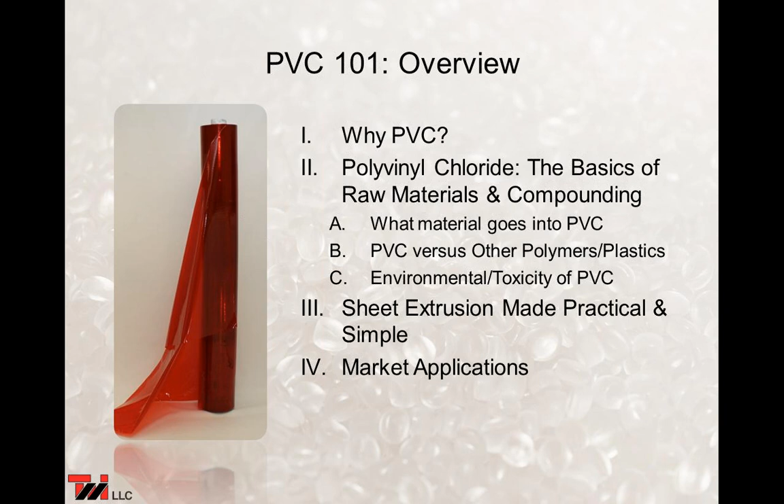So why use PVC in manufacturing products? Four key reasons that we see. First of all, inherent flame resistance. PVC is naturally flame resistant. The thicker the material, the more resistant it is to flame and fire.

Faster part approval. So if we take a sheet of PVC and we make parts out of it for, let's say, the automobile industry, the material meets agency flame ratings, which reduce part testing and turnaround time for getting the products out into the marketplace.

Chemical resistance. PVC resists discoloration or stress cracking from cleaners, foods, oils, detergents, insecticides, and many chemicals. There's a lot of information available online, or through some of the references we'll show you later in the presentation, as to what chemicals specifically it is resistant to.

UV resistance for an enhanced image of your finished products: in their final application, parts look newer longer because they resist discoloration due to UV exposure. PVC is naturally UV resistant. However, if there is going to be long-term outdoor exposure, then a UV inhibitor has to be used in the product to make it more UV resistant for a longer time. Specifically, if the part is used in New Mexico versus being used in Minnesota, you have two very different applications that it has to be prepared for with the UV inhibitor.

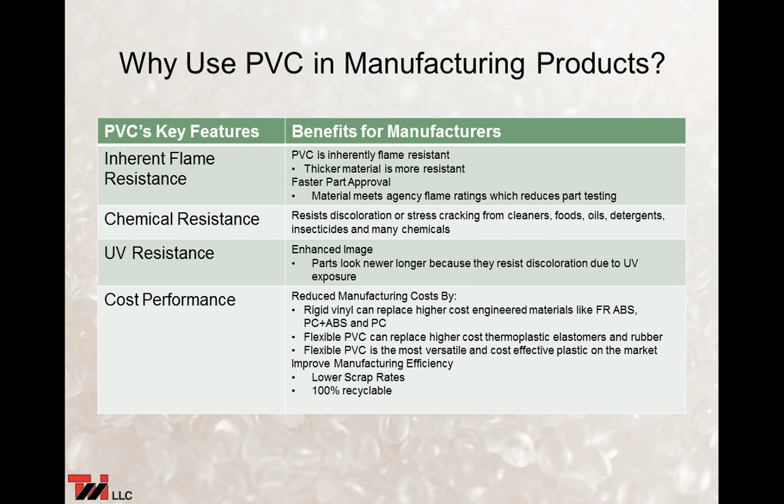We've listed some of the many markets that are available. There are so many applications that we've just listed some of them, specifically maybe more suited to sheet extrusion and calendering, which we'll get into a little more later. Strip doors, such as walk-in freezers or freight doors, 8-inch, 12-inch, 16-inch strip, I'm sure you've seen that in its application. Clean rooms for medical device manufacturing, usually related to the medical industry. Computer and electrical equipment enclosures, data center enclosures, where you have to have no static electricity, so you use an anti-stat type product. Sound block or sound attenuation, a huge market, where you might need something like a theater application where you don't want any sound getting outside, so you build into the walls a sound block product. I mentioned automotive - there's so many applications in that industry.

The shades that go in the back of SUVs, the heel and toe pads that go underneath the matting on the front driver's side of the car. Tank linings, again a broad industry. Tank lining is used for potable water tanks - we'll talk again about NSF 61 - but also for grease tanks, used at a restaurant for instance to store their grease out back. For fuel, for oil, spent oil at service stations, again so many applications.

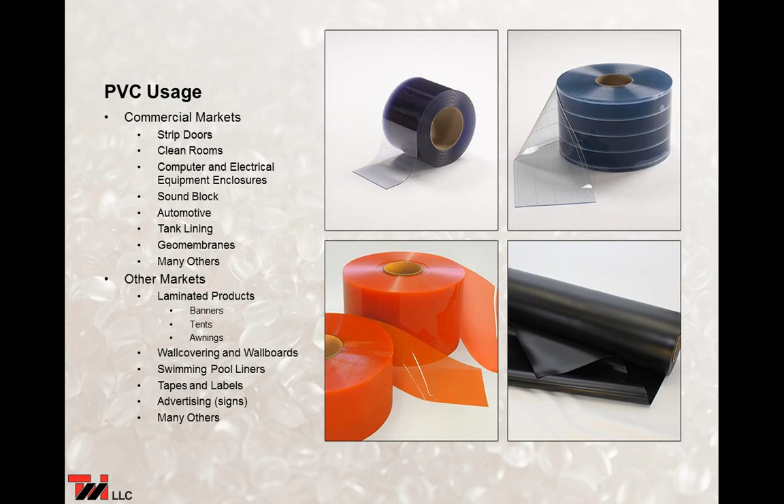So let's talk about PVC, the basic product. There's a lot of misunderstanding, and lack of knowledge is maybe a better way to put it, out in the marketplace about what PVC resin is. I'm not a chemist, so I'm not going to get too deeply into the basics of how it's made, but I do want to dispel some rumors and at least give a little information on it.

One of my favorites of the misuse of it is if you go into a DIY store like Home Depot, or any DIY store in the country, and go to their outdoor furniture area. If you walk up and look at those plastic chairs sitting there, the cheap ones, $10, $20, whatever they may be, ask the clerk what it's made out of, and they'll tell you it's made out of resin. What kind of resin? It's made out of resin. Well, the fact of the matter is it's made out of PVC resin.

So anyway, PVC resin is the building block of polyvinyl chloride, or the building block of polyvinyl chloride sheet. It is a product of salt and oil or natural gas. Generally in this country, natural gas is used to make polyvinyl chloride resin, but it's a combination of the two. Other polymers, as we'll look at later, do not use salt as one of the building blocks - that's the difference.

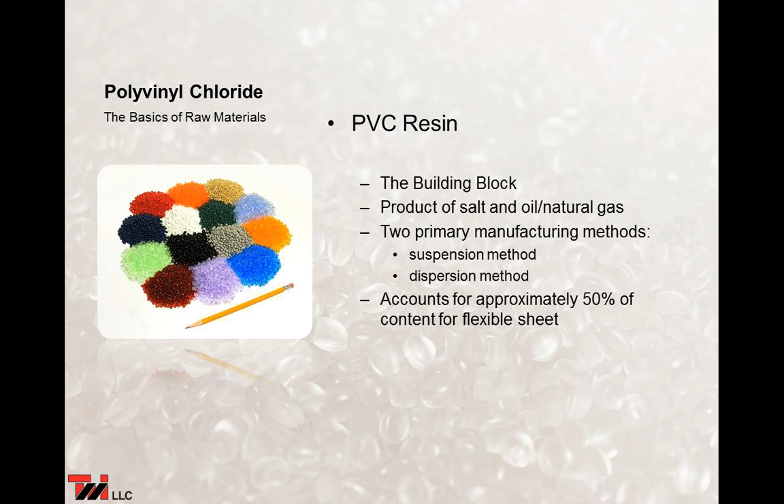Plasticizer accounts for 30 to 40% of the flexible sheet, so those two raw materials make up the biggest part of the product. We'll talk a little bit about market pricing and how it's driven, but if market pricing affects either of those two, you can see how much of a difference that'll make on the cost of PVC sheet.

Plasticizers are the additive that give flexibility and pliability to flexible sheeting. Types include phthalates, which I'm sure you've heard of as allegedly a bad actor, and adipates, which are generally used for low temperature applications—freezer applications or cold winter weather. Then there are phosphates, used as a flame retardant additive in clear sheet, which helps maintain the clarity of the sheet.

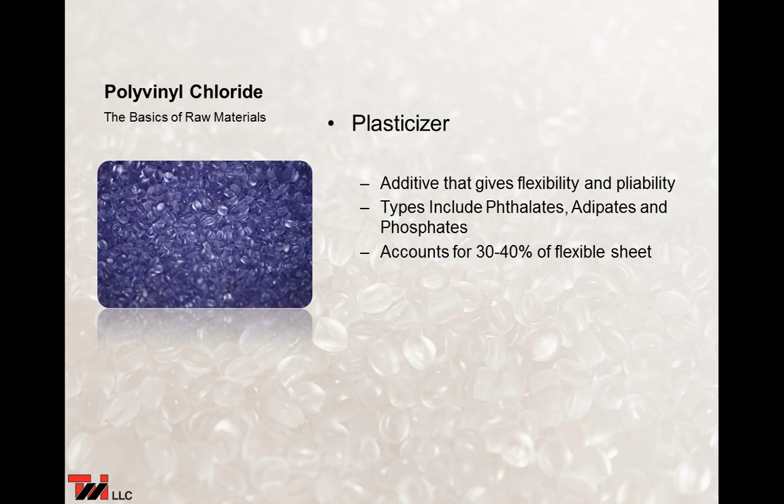So let's talk about the remaining 10 to 20%. These come in varying quantities depending on what you want the PVC flexible sheet to do. Fillers—you want to use as much filler as possible because it's a very low-cost additive. It's basically calcium carbonate or clay.

The stabilizers are used to stabilize the sheet during processing, either the initial compounding process or the calendering or sheet extrusion process. They help keep the material clear and help keep it from burning up. Some common stabilizers are barium zinc and calcium zinc.

Next is process aids. Process aids basically help in the processing of the material through the equipment. Too much and you have exudation on the material. Too little, the material doesn't process very well.

Fungicides—there are basically two kinds, Vinyzene and zinc borates. Vinyzene is very commonly used in wood to keep bugs out of the wood, literally. Fungicides, again depending on the application, for an outdoor warm weather application you want to include more fungicides.

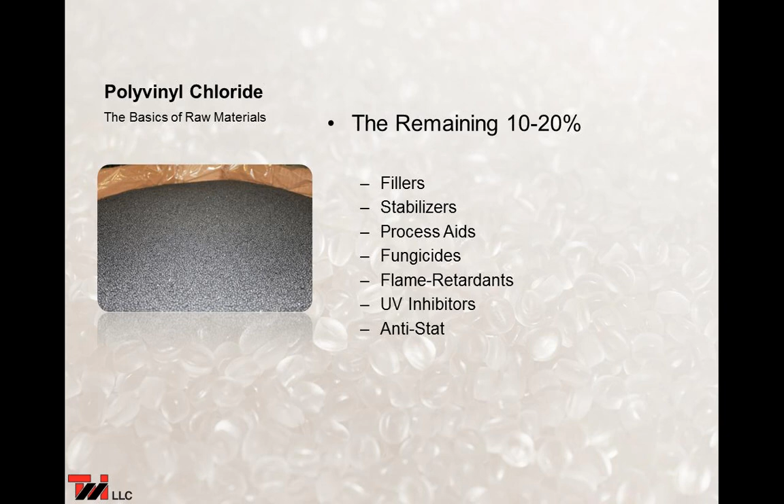I mentioned pricing in the PVC sheeting market. It's driven by two primary items: oil and/or natural gas pricing. Even though most PVC resin in this country is made using natural gas, oil still is one of the big drivers. If you watch the pricing of oil, you can see what's going to happen to the cost of PVC—manufacturers still tend to follow oil prices. As oil prices increase, prices for other polymers based on 90 to 100% hydrocarbon, like polypropylene and polyethylene, increase at a higher rate than PVC, because PVC is only 43% hydrocarbon based, so there's a lot lower usage of oil and/or natural gas in manufacturing PVC resin.

The second factor is seasonality. This refers to the beginning of the construction industry, generally in the March, April timeframe, when construction starts to take off—you'll see the price of PVC resin, which affects PVC pricing, start to increase. Generally at the end of the building season, you'll see the pricing start to back off.

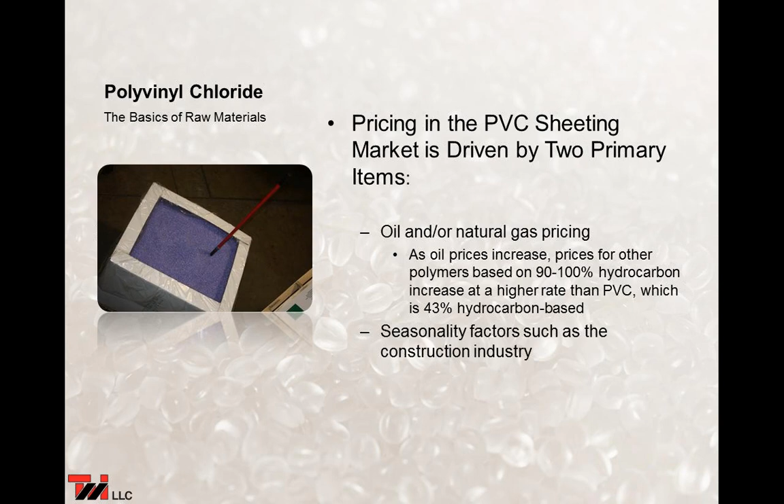There are other factors beyond these two primary typical ones. The hurricane down in the Gulf of Mexico, I believe back in 2005, made a huge difference in pricing—it knocked out a couple of crackers, so they had to shut those down, and there was a raw material shortage for the basic building blocks of PVC. That type of thing will affect it. There were also issues with raw material supplies out of China a number of years ago, which dramatically affected pricing, and we recently had a shortage in anti-stat raw materials, which also affected it. Generally, though, these two are the biggest factors.

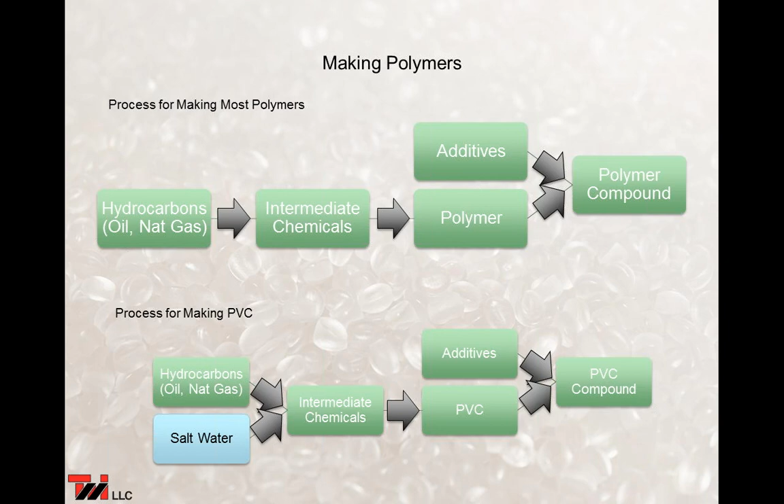USA and Canada PVC demand in 2010 was 9.5 billion pounds. China, which everybody knows is growing dramatically, is expected to demand up to 44% of total global demand by 2020. They're going that direction, while the United States is going the other direction. Two of the biggest drivers in the PVC world are PVC pipe and PVC windows. Those two together account for a total of 58% of the total demand for PVC. Big drivers.

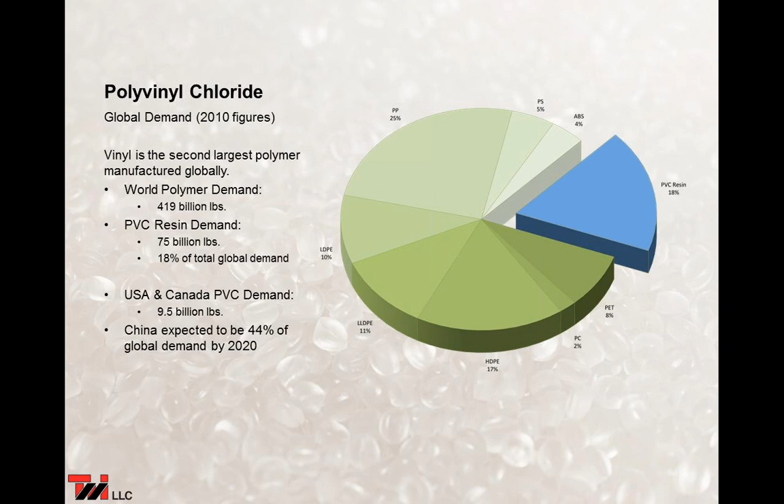Calendared vinyl film is a much larger process, with 9-foot diameter rolls. The machine itself is probably 60 feet long, a very, very complicated piece of equipment. Calendaring started back in the days when the tire industry first started - they invented calendaring lines to make sheet rubber for tires. It evolved into PVC and other polymers being developed, and basically it makes a sheet that's then converted into a product for any number of end-use applications. You can calendar film down to 3 mil, 2.5 mil, or 2.5 thousandths thick, generally up to about 30 mil, although some calendars make heavier material.

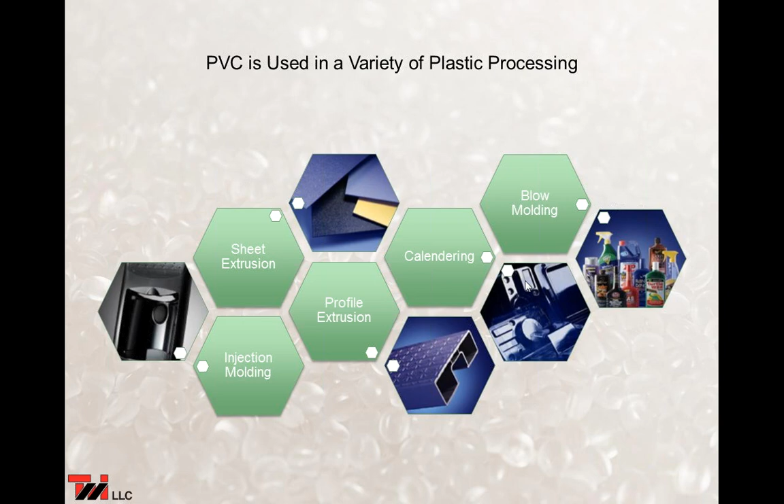Let's talk about some of the eco-friendly advancements - there are some pretty exciting ones. The first one, I'd say, is going to be something widespread. Many manufacturers of plasticizers have come out with a bio-based plasticizer. It's plant-based, meaning a smaller carbon footprint, and of course it's a renewable resource. All testing to date has shown pretty much that it acts and reacts just as a phthalate-based plasticizer system or adipate or any of the other types of plasticizers. So stay tuned, I'm sure we're going to hear quite a bit more about that one.

And of course, lead additives are phasing out in North America and Europe, just about there, and lead should be removed from these products. It's not something that we want to put in a landfill, basically, is what it comes down to.

On the eco-friendly side, there are fewer volatile organic compounds generated in PVC than in PE, PP, or ABS. Vinyl chloride and chlorine gases are not released if PVC degrades - another misnomer out in the marketplace is that if you put it into a landfill, you're going to get the emission of chlorine gases. Not true. PVC can be safely recycled, landfilled, and incinerated. PVC is also processed at lower temperatures than competing polymers, meaning it requires a lot less energy.

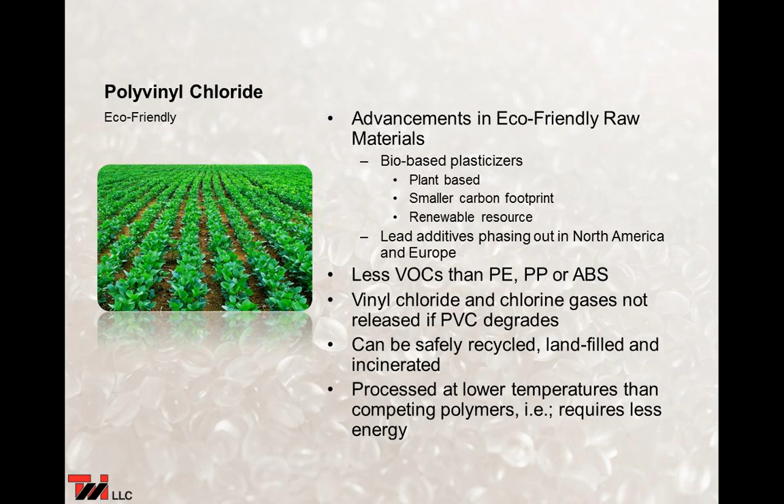Safe, non-toxic polymer, PVC has been safely used for over 50 years. Vinyl chloride monomer, VCM, is the basic building block of PVC resin. I'd encourage you to go online and look at videos on Wikipedia or other sites that show the exact process for making VCMs. It's a fascinating operation, but the exposure is well below levels that pose any type of threat.

The FDA, Food and Drug Administration, has approved PVC for food packaging. The FDA and the United States Pharmacopeia have approved it for medical use. CPSC, the Consumer Product Safety Commission, a federal agency, allows vinyl use in children's toys. We'll talk more about phthalates and some of the other misinformation out in the field a little later. The NSF International has approved it for potable water piping, NSF 61 specifically refers to that. Underwriters Laboratory, the CSA, a Canadian FR codes approval group, California State Fire Marshal, and the National Fire Protection Association have all approved PVC for fire safety. And finally, PVC has not been legislatively banned by any country, state, or province.

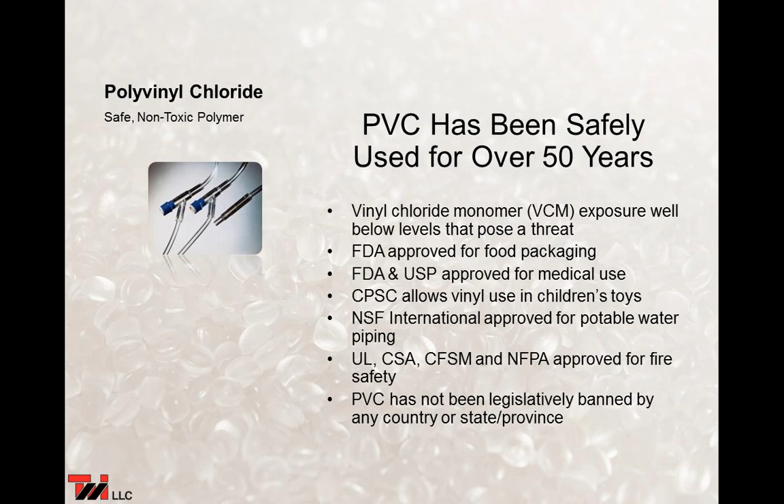So let's talk about phthalates in children's toys, and the Consumer Product Safety Improvement Act's phthalates provision for toys. We've provided a full breakdown, a two-page summary, which we'll glance at near the end of the webinar. It's very wordy and complicated, but it will be included in the webinar notes, so if you want to refer to the legislative action on phthalate plasticizers, you'll have it at your fingertips.

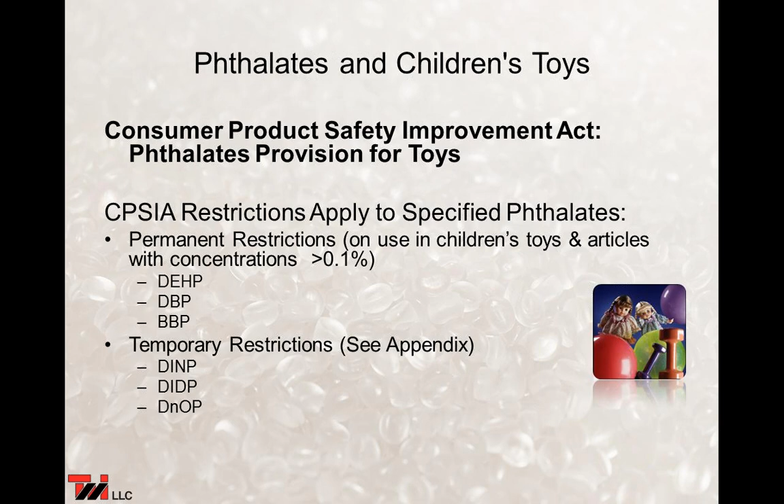The CPSIA restrictions apply to specified phthalates. There are permanent restrictions on certain phthalates for use in children's toys and articles at concentrations greater than 0.1%, and those three are listed. Temporary restrictions were placed on DINP, DIDP, and DNOP. DINP and DIDP are by far the two phthalate plasticizers most used in the production of flexible PVC sheeting. But these temporary restrictions aren't quite what they appear to be — we'll talk about that shortly.

The materials are then pelletized. If you've been in a processing plant like sheet extrusion or calendaring, you'll see the pellets — they're just exactly what they sound like, little pellets. In the background you can see pretty much what they look like, but they're air cut, underwater cut, or strand cut. The pellets are then packaged and shipped to the processors.

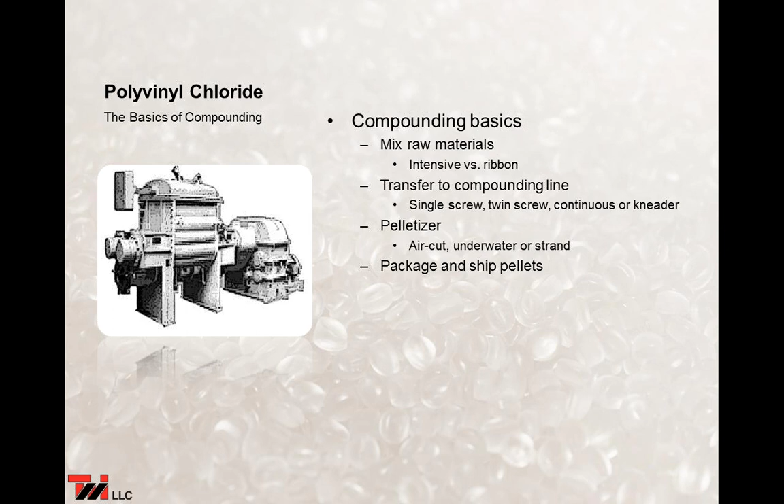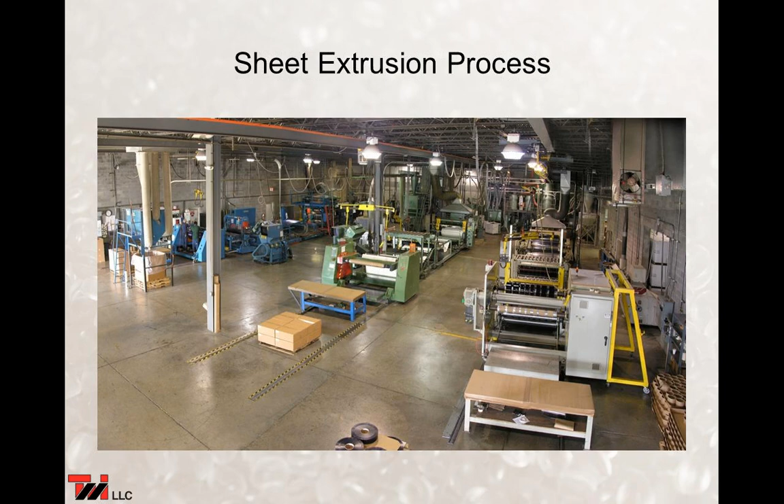The material then goes through a cooling water bath and out into a slitter, where it's slit down to various widths — that's the point where you get your 4-inch wide, 6-inch wide, 8-inch wide, whatever width might be needed. The excess material is removed and driven back through the process. With 100% recycle, it's driven back through and reused at about a 25%, maybe slightly higher rate. The material then goes into a winder where it's wound up on a core, depending on the product being manufactured.

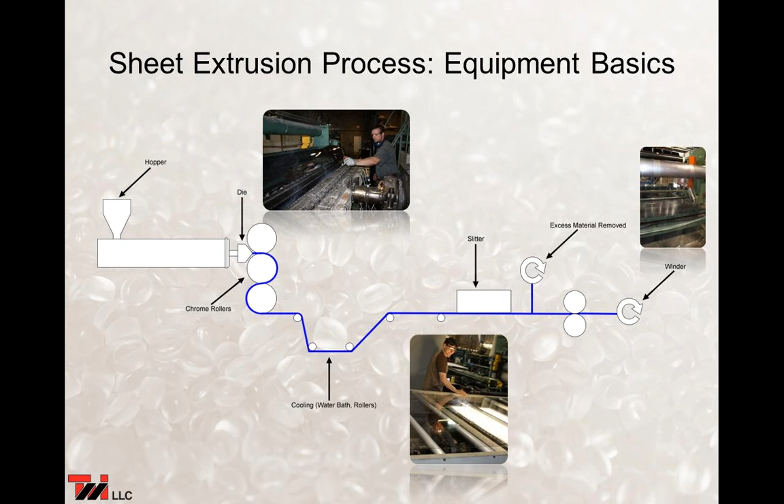So let's walk through it real quickly.

Compounded raw materials, as we mentioned, are moved to the manufacturing area, typically in boxes, gaylords, or via a silo. Silo is the most efficient way to do it. You fill the silo up and then vacuum basically the materials out of the silo into the dryers or hoppers. Compound is then taken from that point into a system of hoppers and dryers, and that's the image on your left. You can see the vacuum hose in the gaylord removing the compound from the gaylord.

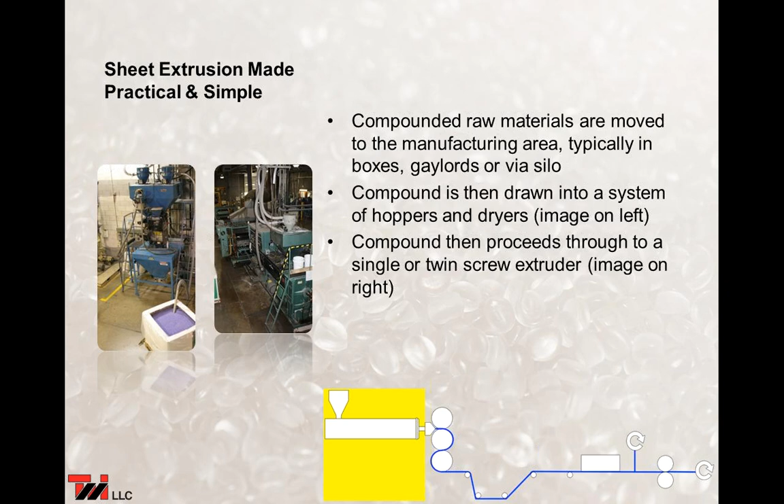Compound then proceeds through to a single or twin screw extruder. That's the image on the right and the highlighted image below. This material is then conveyed through the screw and into a sheet die. The compound is remelted and mixed by both shear heat and pressure through this process. So, as we mentioned earlier, it goes through the extruder through a process where it is melted in the screw and out through the die.

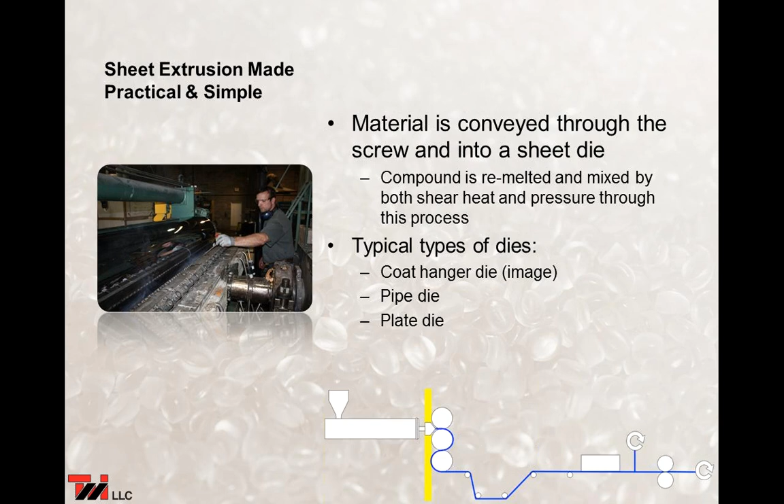After exiting the die, the PVC is then forced through a series of chrome rolls. Thickness of the material through these two processes is determined at this point in the process. Typically in a sheet extrusion operation, which is what you're looking at, material ranges anywhere from 30 thousandths thick up to as much as a half an inch thick. Quite a broad range. Those three rolls, typically there's three types of rolls that are used.

A high polished roll, a frosted roll, or this is where the embossing is done on the material. If you have a light stipple or a leather grain emboss, you would remove the top roll in the stack and put that embossing roll into that point, and that's what gives you the embossing on your material, or the grain as some know it.

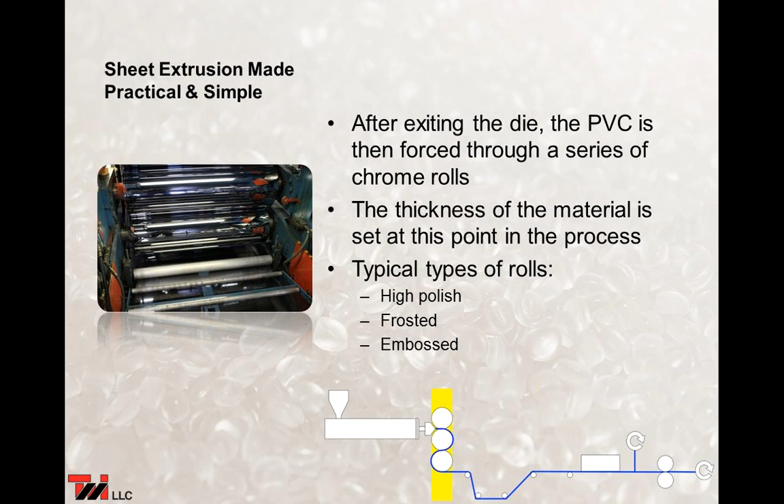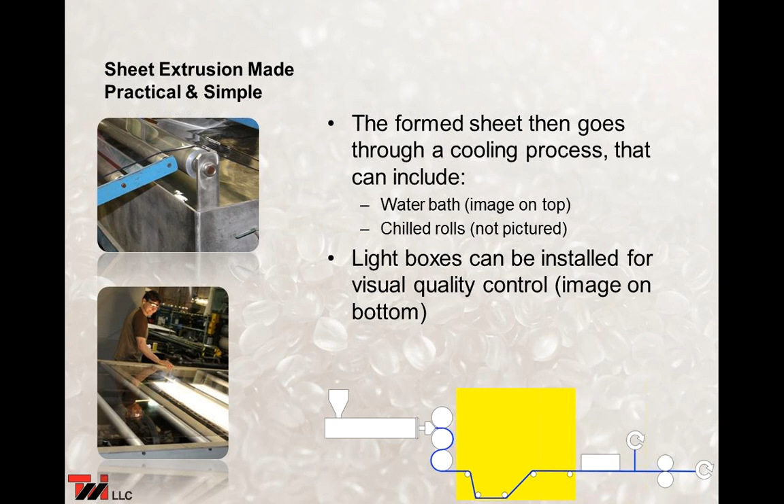And if you look closely at the picture, and we actually have a video to show you that'll illustrate this a little bit better. But the material in the middle and on the sides that's being pulled taut is being fed into a grinder and then back into the front of the process to be 100% reused.

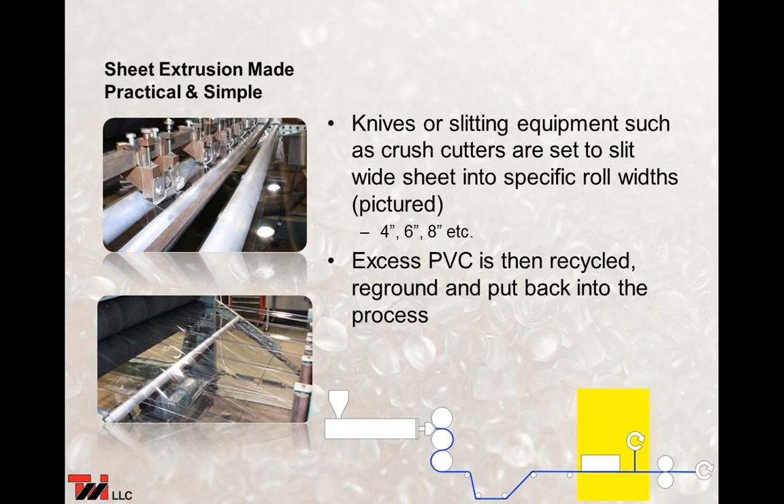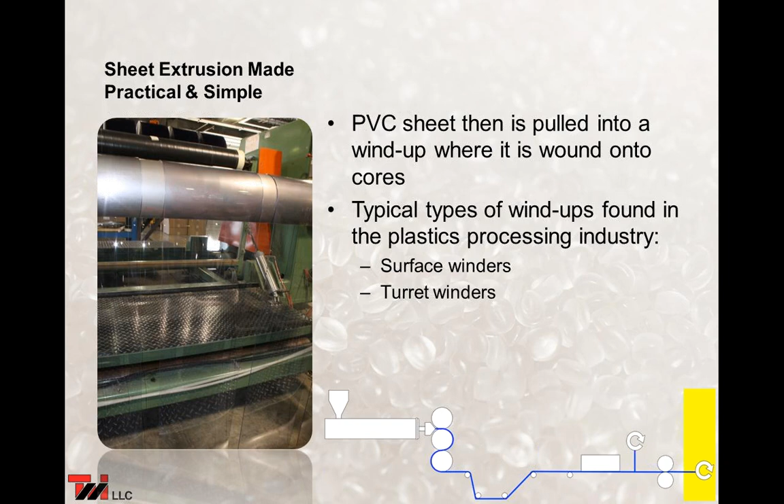And finally, the winder. This is where the material is wound up on cores, as pictured on the left-hand side. Typical types of wind-ups found in the plastics processing industry are surface winders. Much more broadly used are turret winders, where you basically have a continuous process as you cut off one roll and start on another roll.

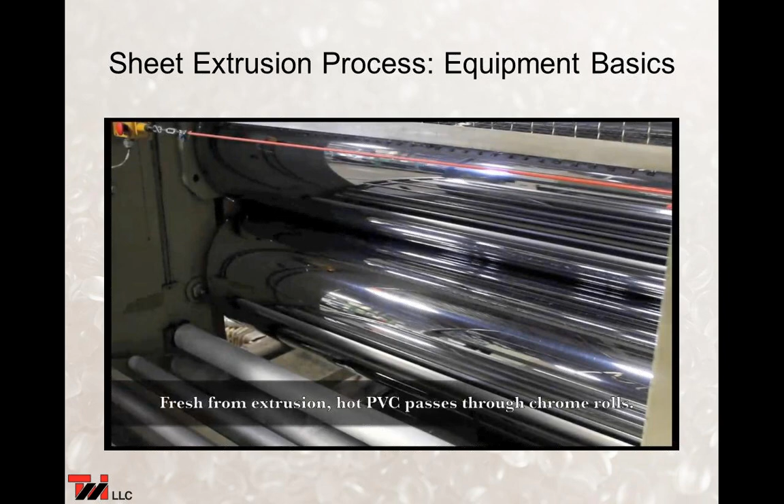Okay, short video. You can see the material is going through the three-roll stack at this point, coming out still very warm, heading to the water bath.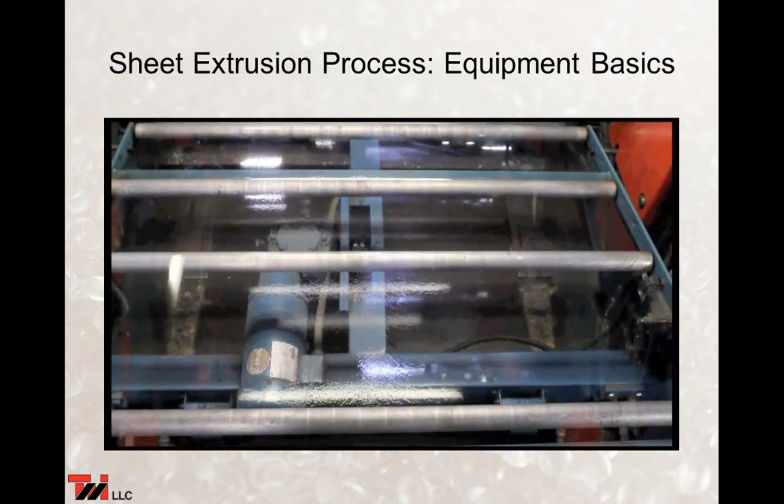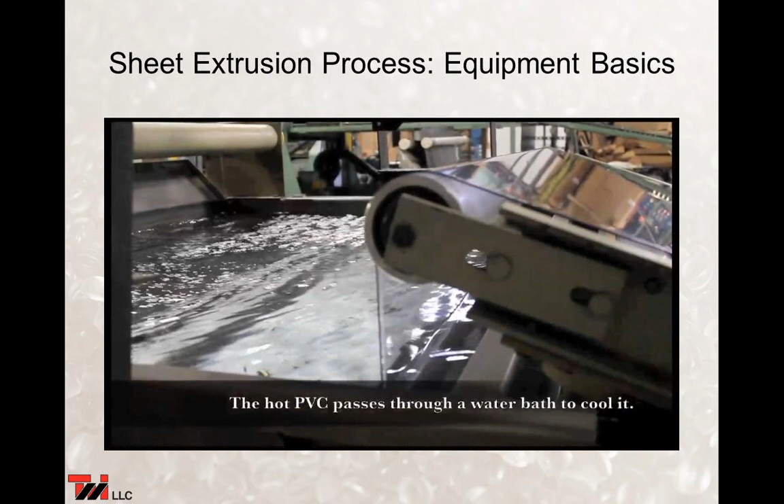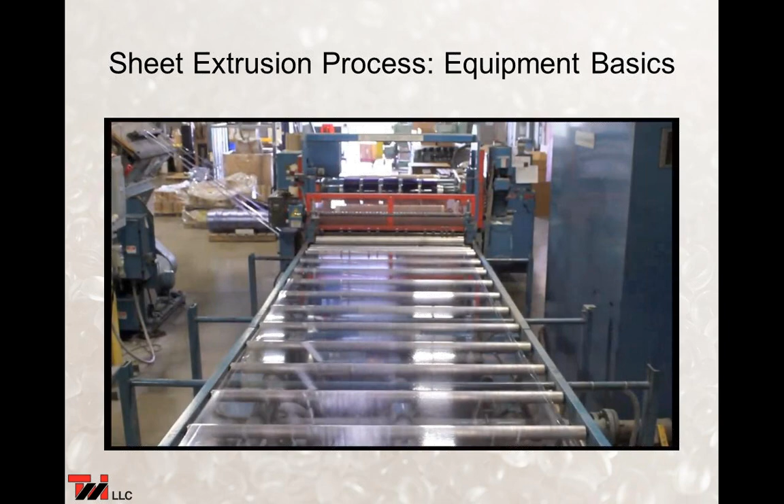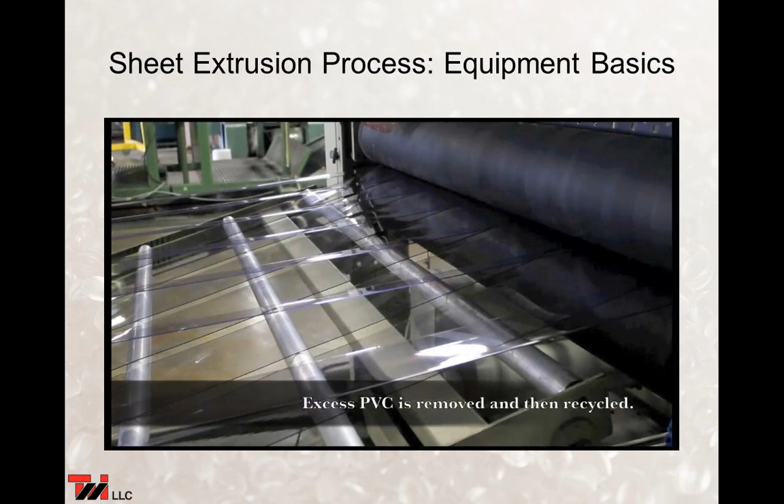Cools the material and sets it, basically, through a series of rollers, which is where the inspection is done and further cooling takes place. And finally, the cooled PVC is split down to the final roll widths at the knives, where we mentioned the knives are the crush cutters. This is where the recycled material is fed back through. Finally, the finished rolls are wound onto cores.

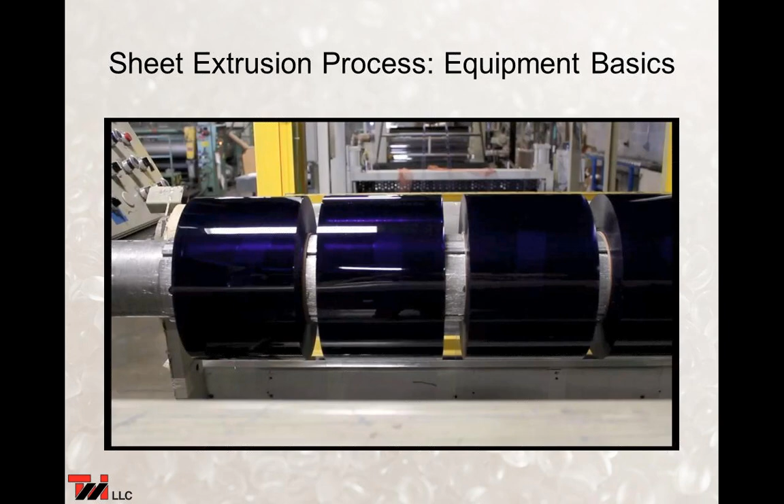So let's talk about some market applications. Some of the market applications pictured here, as we mentioned earlier, are the strip doors. What you're looking at are warehouse doors, especially handy in the winter months or to hold down dirt and dust. You put these strip doors up over the opening, and it cuts that cold air or the dust and dirt off from the rest of the manufacturing or converting facility. These are used in so many applications across the world.

Freezer doors, walk-in freezer doors at restaurants or grocery stores or storage facilities. We've seen them used in agricultural applications, in barns even, to hold down the weather between the animals and the outdoors. Such a huge variety of applications. A great seller. Data centers, as we mentioned earlier, used as overall enclosures, but also to separate the computer equipment or the servers. Anti-stat is a very widely used product in that industry. Also flame retardant, of course.

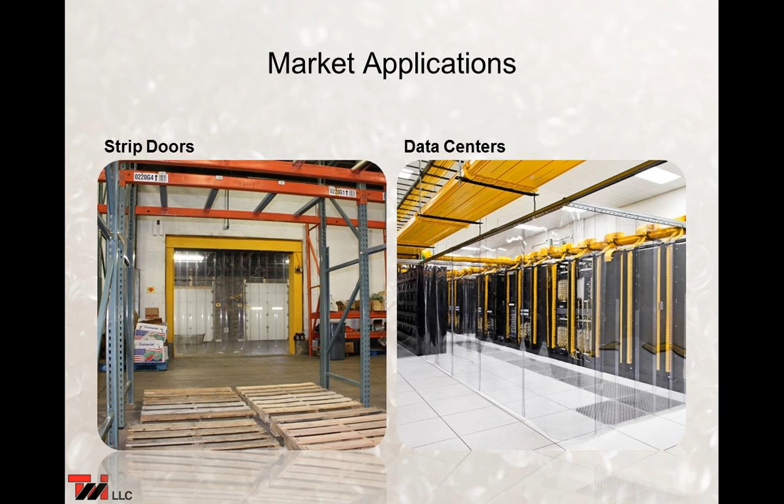On the left-hand side, you see tank linings. Again, a huge variety of tank lining applications in the marketplace for holding any number of types of products - chemicals, grease, potable water. On the right-hand side, you'll see enclosures. If you notice in the background, there's a clear sheet enclosure being used on this application. And in the background, you might notice coated or laminated fabrics on the tops of those tents. That, of course, uses PVC sheet for laminated products and a dispersion coating on coated fabrics.

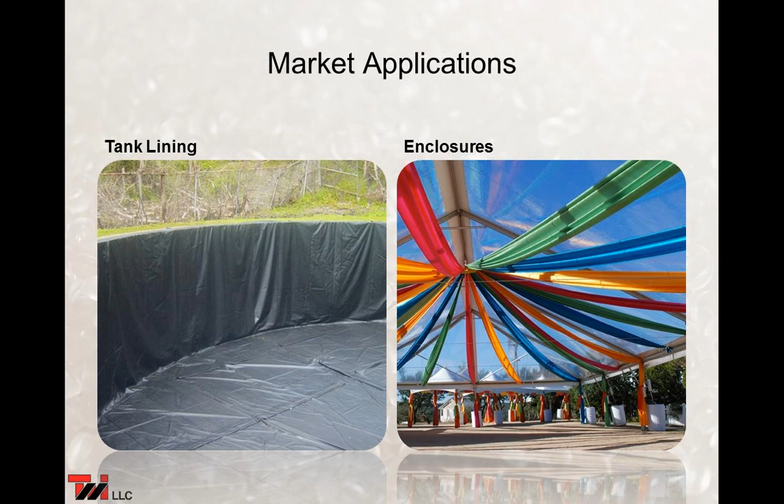So, quick summary of what we talked about today. The compounding raw materials are mixed and extruded as pellets. In the extruding process, pellets go through a series of hoppers and dryers, then through a single or twin screw extruder. The hot material winds through a 3-roll calender stack, and it's embossed at this point. PVC sheet is cooled and wound onto cores.

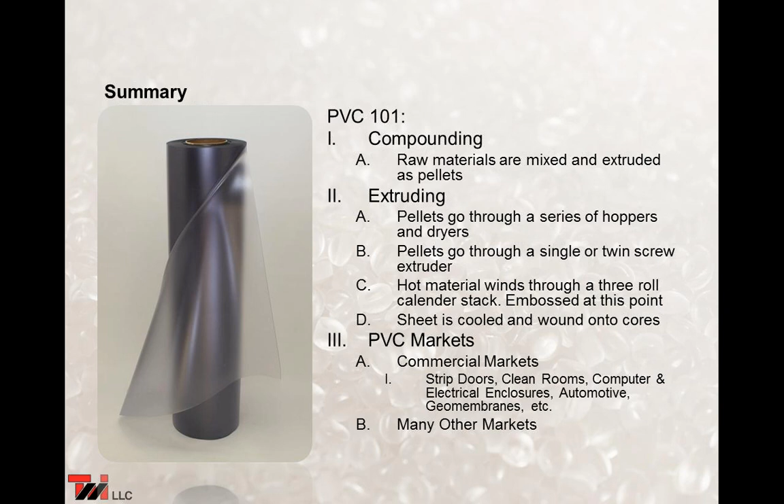Some of the markets then that we've talked about commercially are listed below. And of course, there's so many other markets that it's obviously difficult to list those here. So here's a slide that can provide you with additional information.

I want to skip by this real quick. Just take a quick look at the appendix. You notice the second bullet point. Temporary restrictions were placed in 2009 on the sale of children's toys that can be placed in a child's mouth. Toys that can be put in the mouth are defined to include toys or parts smaller than 5 centimeters in one dimension. Toys that cannot be put in the mouth but can be licked are not included.

So there are some temporary restrictions that are on the materials, but they're very small. The play mat in a child's play pen, for instance, is made out of PVC. That would not be included in this type of restriction. Then the second page has a lot of interesting information on DINP and phthalates as a whole.

In 2001, a review was done of the safety of DINP. It concluded that for the majority of children, the exposure to DINP from DINP-containing toys would be expected to pose a minimal to non-existent risk of injury. So that was a previous ruling. CPSC has never expressed immediate concerns about phthalates used in toys and child care articles. Therefore, consumers should not be alarmed or concerned that some children's products may still contain phthalates.

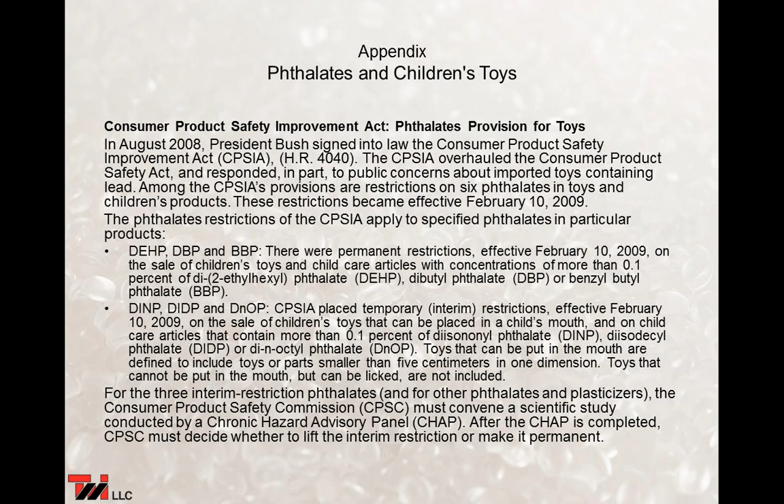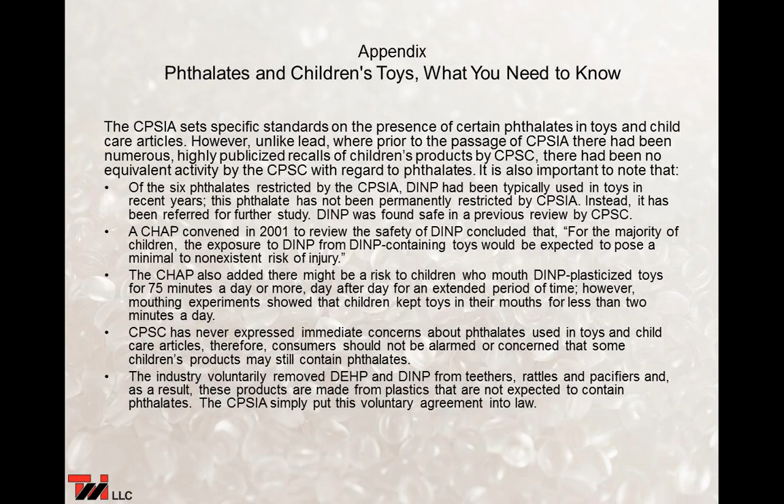There's one comment in this, and I jumped to this page. I'm not an expert on that, and I can't really comment on what those injuries might be. But if you read the third bullet point here, it might be a risk to children who mouth DINP plasticized toys for 75 minutes a day or more, day after day, for an extended period of time. However, mouthing experiments showed that children kept toys in their mouths for less than 2 minutes a day. So again, I'm not the expert on that, but that's one of the comments included in the appendix.

And I should say, to take a step back to the lead question, strip doors can actually help you meet the requirements for lead. Good to know.

Are you up for a few more questions? They keep coming in. Sure, and I'm going to refer some of these to Jim Lutz, our manufacturing manager, who is in the room with me, and to Norma Spence-Turner, our process engineer and quality person. So I'll try to answer them, and if not, I'll defer to them.

The next one is, how does PVC pricing generally compare to pricing of other polymers, for example PP or PE? Generally, PVC pricing is lower than the others as a finished product—I should say sheet products or calendered products from sheet extrusion. Generally, PVC is much more cost-effective. Again, it depends on the application and what raw materials are built into the product, but as far as the final application goes, generally it's less expensive.

Next question: is lead still used as an additive in any PVC-related product, or is it completely banned in the United States? That's a great question, and I'm not the expert on that answer. I know that most manufacturing and processing facilities in the United States have removed lead from their operations, all forms of lead, all types of lead. There's still some lead used in colorants, in the pigments that are used—they haven't been completely banned, all leads. Some have not. But generally, manufacturing operations in the United States have removed lead from their operations. Our facility here, for instance, is totally lead-free.